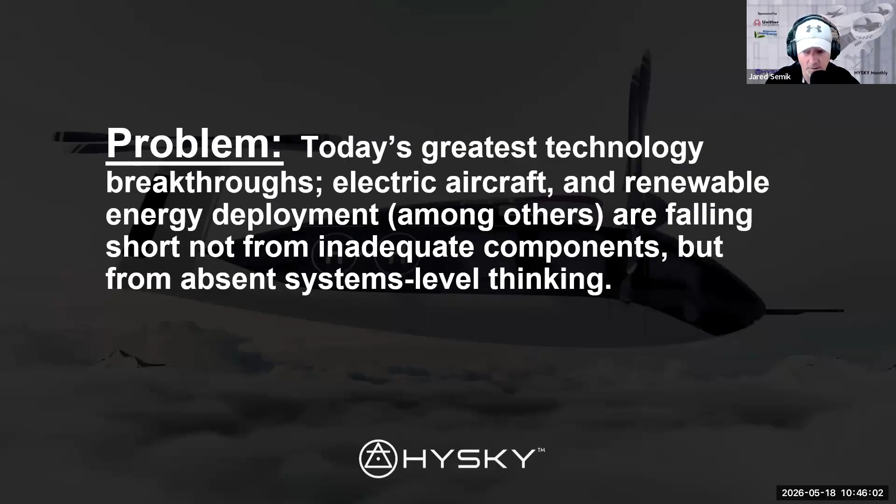Holism brings optimization and maximization of performance. Often the existence or non-existence of holism, either patchwork or holism, makes or breaks the actual economic and performance viability of a technology. So let's start with a couple of definitions.

Paradigm is a distinct set of concepts, thoughts, patterns, theories, and assumptions that constitute a legitimate framework for viewing and acting upon the world. This is our mindset, thought patterns, theories, and assumptions. This drives the way we think. The lack of holism in a lot of systems we're creating from a technological perspective...

...is driven by the fact that we have pre-existing paradigms that have been optimized through patchwork. Once we've created the system over time, say for instance aviation, it started out and evolved into this paradigm and way of thinking. The crux of this is when we start trying to change the paradigm, so it becomes very crucial that we hold a holistic understanding of how to change it.

The paradigm isn't just the way we're thinking about it. The paradigm can be the system in itself. So essentially it's a system of thinking, but it's also the system.

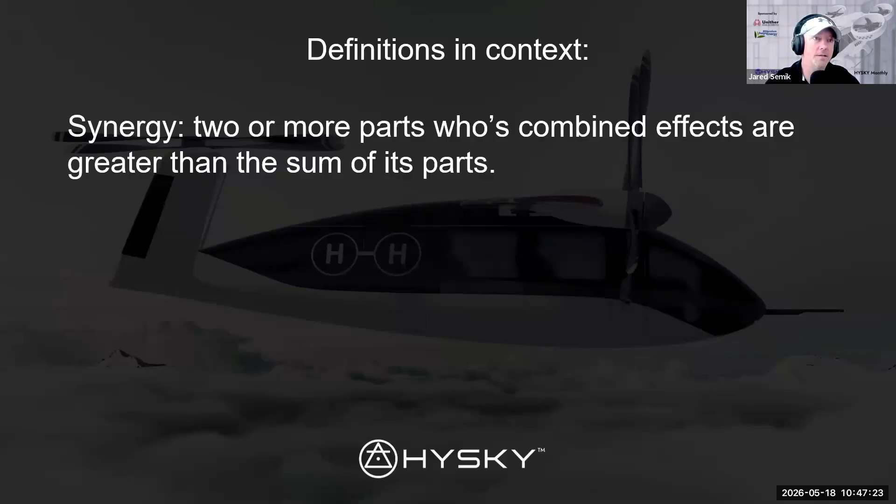One of everybody's favorite buzzwords is synergy, but let's define it: two or more parts whose combined effects are greater than the sum of its parts. We all sort of know this, but effectively the reality of that is synergy is found in shared energy and function. We always talk about synergy, and this is probably one of the things we fall flat on a little bit in engineering.

We get very hyper specialized, very hyper focused on components. In the process of improving those individual components, we do a very good job of creating new motors, new hydraulic systems, and new airframes, but we don't necessarily do a good job of sharing that energy and function. A couple of the positive case studies I'm showing will illustrate how that's actually accomplished. So this is what drives the synergy.

Holism is a philosophy that systems, whether physical, biological, or organizational—which goes back to what I was talking about with the Marine Corps MAGTF—can have holism in basically anything: physical, technological systems, biological like holistic medicine, or organizational like Marine Corps MAGTF. ASEX, I would say, is probably a holistic organization, the way they think.

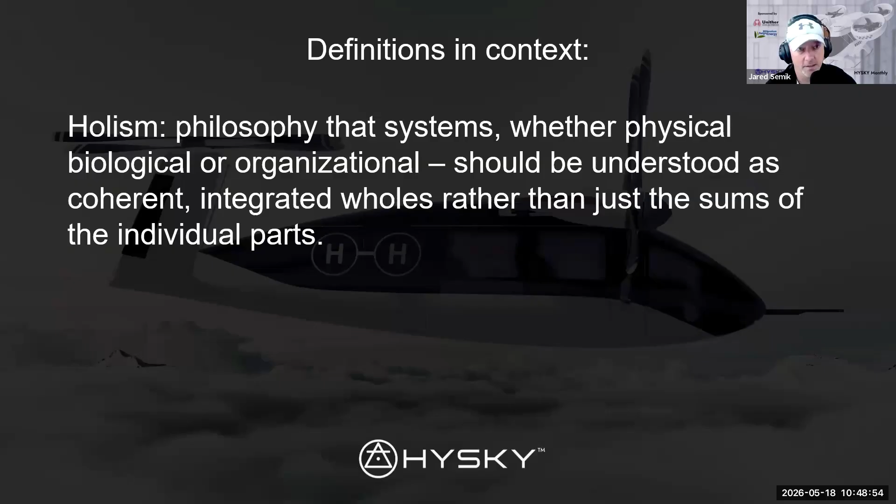It should be understood as coherent integrated wholes. Let's pause there—integrated wholes is the operative component here, rather than just the sums of individual parts. You're going to hear this theme emerging. It emphasizes that the system possesses unique emergent properties—that's another key axiom—emergent properties and behaviors that arise from interaction of components.

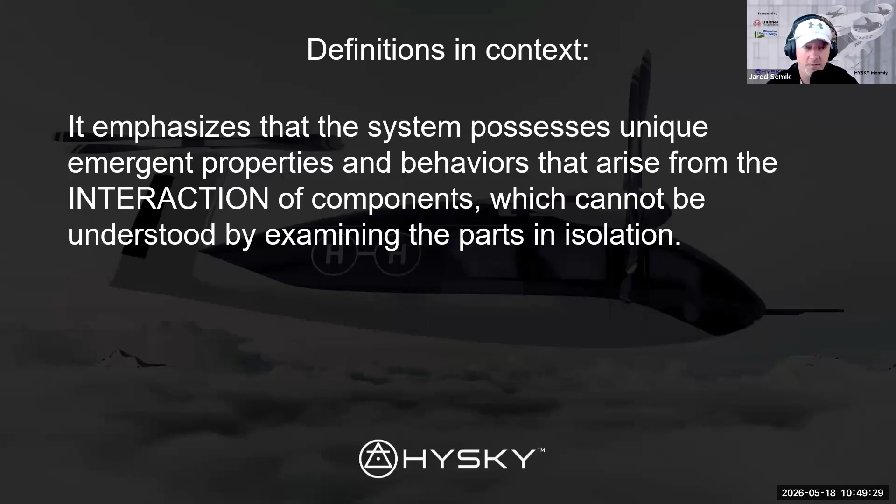Going back to this, the reality of synergy is found in shared energy and function. That's the interaction of components, which cannot be understood by examining parts in isolation. This is kind of what we're doing in some of the technologies we're producing now in humanity. A lot of it is getting the job done in terms of proof of principle and proof of concept, but it's generally falling short. Once again, holism is how synergy is created.

One axiom to ponder, another foundational principle, is that systems are driven by an energy nucleus with unique characteristics, and I'll show you why that's relevant. Every system that we create has a driving factor.

If it's a human system, it could be something like motivation of individual humans—what is the psychology, what is the sociology of the interaction between people? That needs to be understood. It's not just the individual's contribution to an organization, it's also how those parts will interrelate.

Humans in society are probably one of the best examples of how holism works—you either have it or you don't. Good organizations often operate from a very holistic perspective, in the sense that there's a lot of relationship bonding. In the military, we call it unit cohesion and morale. When you have a lot of unit cohesion, if it's an intentionally driven aspect from the leadership, you have all of these multiplicative gains in performance amongst the people.

So your team does quite a bit more with, say, 10 people working together than they would 10 individuals working in silo. So a couple of the examples of those energy nuclei: mechanical energy, like motors, engines, things that move; molecular kinetics. Thermal is basically thermal energy. Electromagnetic radiation, it's not necessarily the radiation aspect, but electromagnetism. This is what you find in motors and generators, etc.

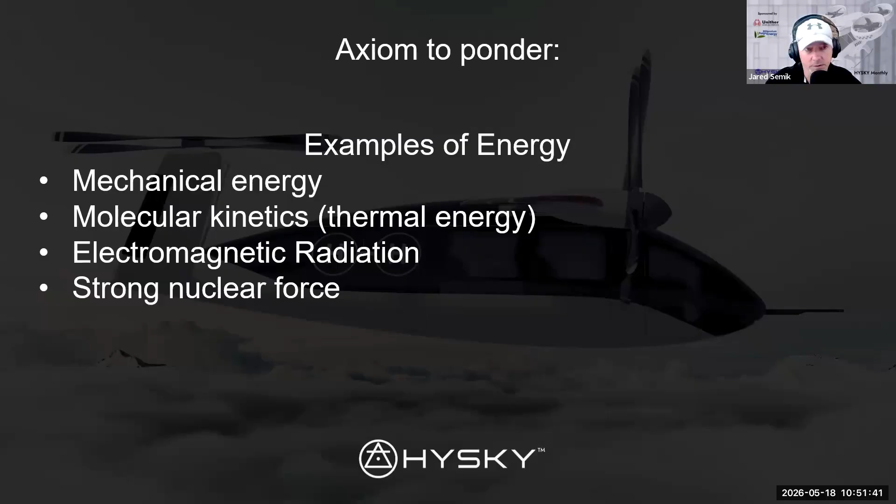All of these are subject to be converted to different forms. And then, of course, strong nuclear force, which is what you find that is the binding energy of atomic nuclei in nuclear reactions for nuclear fission. Any one of these has their own particular unique characteristics that need to be essentially built for or calibrated to.

So with respect to what is most relevant to this discussion for HySky and everyone in the aviation space, is energy storage mediums and their individual characteristics. So we've gotten away with Jet A for a long time, and most of which is simply based on its characteristics, its combustion characteristics, its lack of volatility, and also its power density and specific power. So you have this, because of its molecular density, it has a very good 50-50 split almost of power density and specific power. So per given volume and per given mass, it carries an adequate amount of energy that we can convert into something like thrust and then eventually into lift to do work.

When we want to change that paradigm, going back to the beginning where we're laying the foundation of, if we want to change that paradigm, unfortunately, it doesn't necessarily work to now go back to the patchwork optimization model to change the paradigm. You have to go back to a holistic approach to change the paradigm as a system, because again, that paradigm is a system.

So what we're currently facing right now in electrification of aviation is this sort of mismatch of mentality, is that we're doing a very good job, and I'm actually very impressed with a lot of the companies that are out there that are creating great electric motors and great fuel cells and great pretty much everything, and they're getting the job done from a proof of principles perspective.

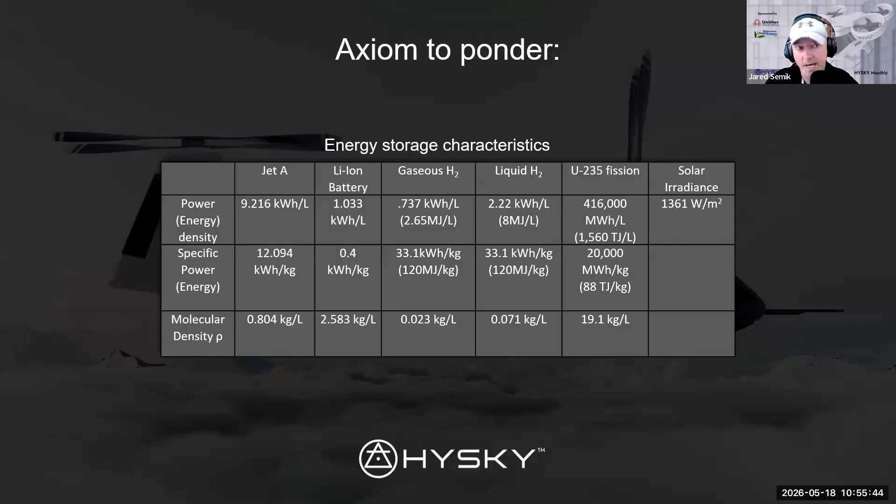So what we need to do is carry more energy. We need to bridge the gap between energy stored and energy used, because there's no amount of increase of volume of fuel stored for liquid hydrogen that's going to overcome that differential of power density that you get between the two.

So this is sort of where it ends up lending into holistic engineering. One follow-up is in holistic engineering, the system architecture calibrated to the energy nucleus precedes the components and drives the component development, instead of component development driving the system architecture, which is kind of currently what we're sort of doing.

Once we have a paradigm in place, we sort of have this mindset. So in aviation, we know that we use Jet A, we use open Brayton gas turbines, we use tube and wing. A lot of the stuff hasn't really changed. And what's happening is that we're kind of in a sense saying, what are the easiest low-hanging fruits to kind of replace those components?

Because we already understand this is how an aircraft functions. Unfortunately, so...

A little short story of Eternium is this: this is one of the things I identified in the past 10 years of developing the architecture for Eternium's Archangel. I recognized that if we were to one-to-one swap using a first-order Breguet analysis, to understand range from an empirical perspective, it was always going to fall short if I were to use the existing components and existing methodologies we're currently using without actually optimizing for these particular characteristics that hydrogen or batteries bring.

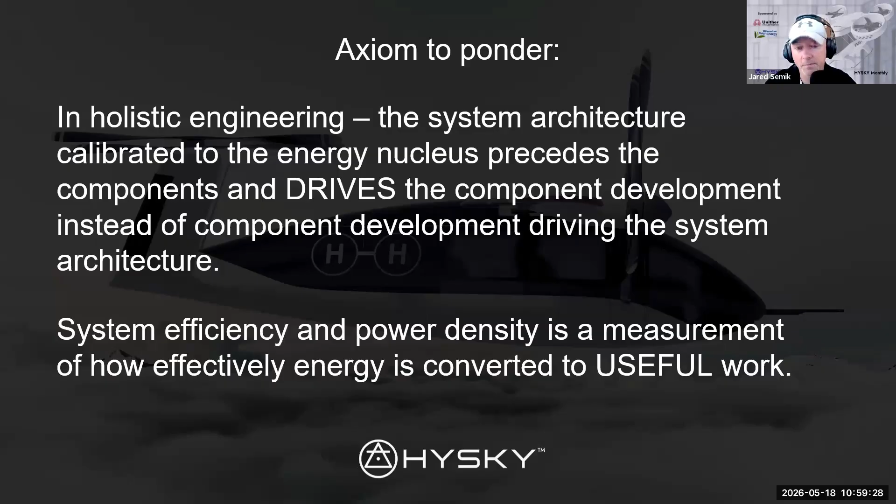It's that there are often times, and I'll show you an example with our aircraft, where if you were to take any of those components and not overlap the geometry, the mechanical function, and the use of energy, you only get singular siloed efficiency gains or power density gains. So in terms of orders of magnitude, you end up falling short.

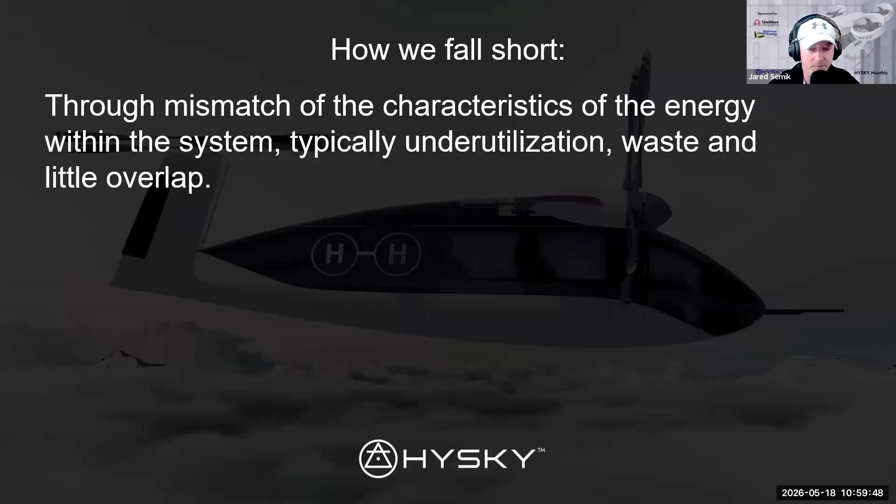So this is essentially what I just said: through mismatch of the characteristics of the energy within the system, typically underutilization, waste, and little overlap, you end up falling short. You end up getting basically a first-order gain instead of a second-order or multiplicative gain. So we can essentially define this as patchwork.

A couple of the case studies that I wanted to go through—disclaimer, these will be gross generalizations because there is so much nuance in this. You could essentially turn this into an entire semester lecture at any university. So what I want to examine is the cases of solar, wind, and concentrated solar power as it pertains to...

The mismatch of the duck curve. Mismatch in production and demand. This was known very early on by the Department of Energy, and it has only slowly been recently addressed. There's a couple of reasons why—some of it's mindset, some of it's economics. They usually walk hand in hand.

And of course, the most relevant here is electric aircraft. The patchwork and lack of first-principles calibration has led to airframes that are not competitive with the incumbent. There's a very important principle here, and I know I kind of get into hot water by pushing this narrative, but one of the difficulties we're running into is that funding operates on the promise of competitiveness in a market and/or cost reduction.

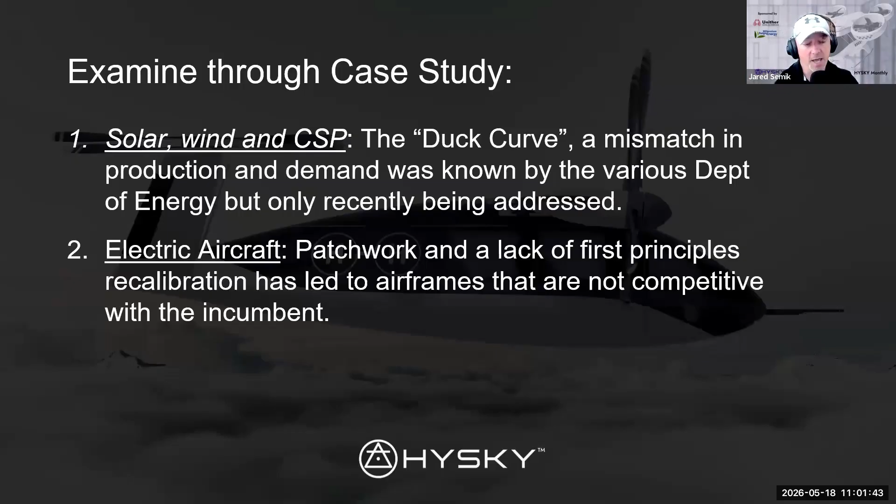It's the economics that essentially drive it. If there's essentially no competitiveness to whatever it is you're delivering on the top end—not the individual systems you're creating, but if that entire system, put against the incumbent, is not competitive without some recognition to its calibration within a niche that cannot be addressed by the incumbent—and I'll show you that in the eVTOL portion of the electric aircraft case study—you can end up with essentially patchwork if you understand the system of its operation and deployment. So, case study number one: deployment of solar, wind, concentrated solar power.

So let's talk about the promises. This is kind of what we're driving towards as goals. So the promises of solar, wind, and concentrated solar power is free energy. So it's not necessarily free, because we all know this...

We have to spend money on the equipment, but once the equipment is purchased, the energy is essentially free. It's ambient to our celestial selves here on planet Earth. So it's renewable and inexhaustible, meaning the sun and the wind it drives won't be depleted for billions of years. Consequently, with climate change, to the degree it's relevant, it's actually increasing the excess wattage retained in the atmosphere, which is driving higher concentrations of wind. So, win-win for wind.

So no greenhouse gases, of course. We all know this, everybody's been drilled with this concept for years now, during use, but only in production. And the production of greenhouse gases during production is actually pretty negligible throughout the life cycle of renewable energy.

One of the emergent properties now is energy independence, and we're seeing this on the global stage. Everybody's been fighting over resources since the beginning of time, and now it's become a global affair. So after production, no further mining, drilling, refining, and no complex geopolitical alliances are necessary to continue power production. This is probably most apparent with hydrogen specifically — say, green hydrogen and point-of-use production — this lends itself very well to energy independence.

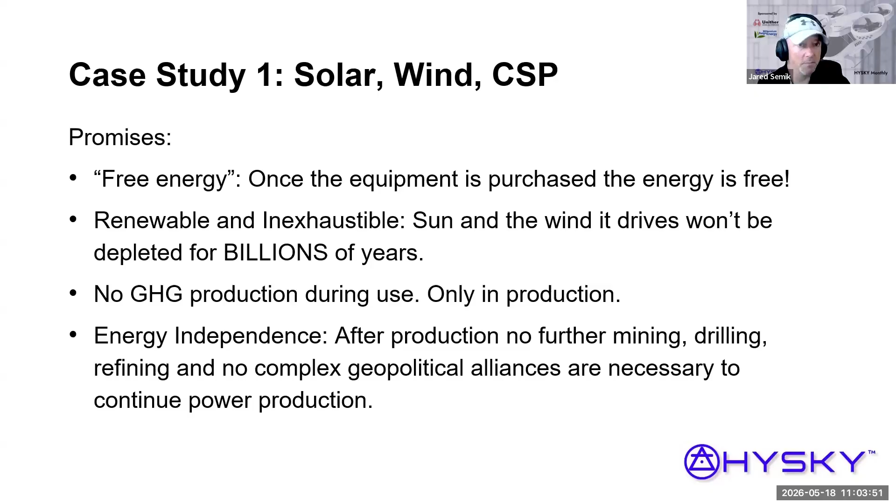So let's talk about the characteristics. With every system in the energy nucleus, they all have their advantages and disadvantages, and this is how you calibrate the entire paradigm — in this particular case, grid production versus cellular production like solar and wind on houses or commercial real estate.

So the advantages of solar: low maintenance, it's pretty much static, we all know this. It's sustainable — the energy comes from the solar radiance of the sun, which isn't going anywhere for billions of years. It's also scalable, since solar panels are small, you can scale them as large or as minimal as you want.

So wind — the advantages are it's very cost efficient, owing to its power density. It converts a tremendous amount of wind energy into mechanical rotation, and then of course into electric generation.

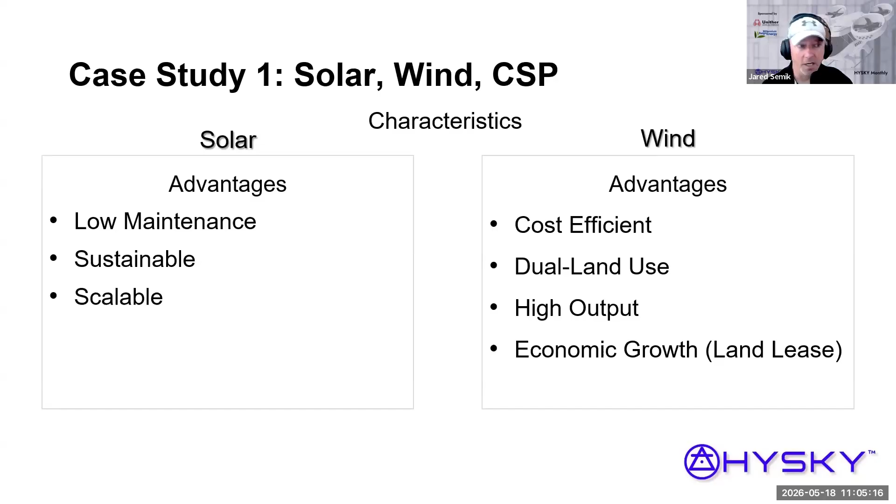Another advantage is dual land use. You can use the land those turbines sit on because of the lack of footprint — for farmland, grazing, or agriculture, etc., which lends itself to economic growth through land lease. You could be using the land, but also leasing it to something like PG&E or First Energy, where they're essentially paying for the use of the land wherever it sits.

Unfortunately, with the good, we also get the bad. This is what we essentially have to calibrate the system to — we have to take advantage of the advantages, capitalize on them, and holistically understand the systems. This is where most of our mitigation of the disadvantages comes from.

So with solar, it's land intensive, of course — it covers everything. What we're starting to see is clever use of solar on parking structures, buildings, etc., and it's been rolling out. I think we're starting to wake up to the fact that the system isn't exactly how we thought it was going to roll out. We kind of looked at it as a one-to-one, apples-to-apples swap, which it generally isn't.

Going back to the core principle, I think we first saw it as, okay, we already have this paradigm — we have nuclear plants, gas electric generation, and coal plants — why don't we just swap in this other component? I understand the engineers and scientists didn't necessarily see this, but this also needs to get into the mindset of investors and legislators, etc.

So a couple of the other disadvantages are material scarcity, of course — some use rare elements. Weather dependent — clouds are a problem; if you live in a cloudy place, solar doesn't work very well. Some disadvantages of wind are its unpredictability — wind is as unpredictable as the wind.

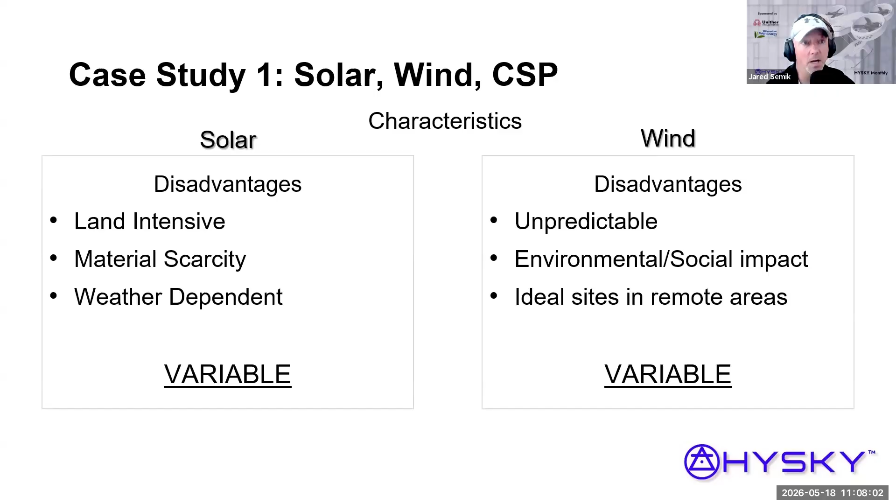But the issue with both of these is variability. So let's talk about the duck curve—this is where it's relevant. They fall short because of the duck curve.

We also have a similar issue with wind power because of its unpredictability. So very early on in the 2010s and 2020s, when solar and wind costs fell by about 90% and 70% respectively, developers treated production and storage as two separate industries. This is where you start getting into this economic mindset, and this is where you start seeing an emergence of patchwork solutions, since at the same time battery costs remained astronomical and would have doubled or tripled the cost of each individual project. These were not developed as a system.

The interesting issue is that each individual company was creating solar panels—they were a solar panel company—or wind turbines—they were a wind turbine company—and they were getting their own individual funding, with their own individual economic prospectus for what the return would be for that particular component. The only issue is there was very little in the way of implementation into the grid. There was talk of it in the 1970s.

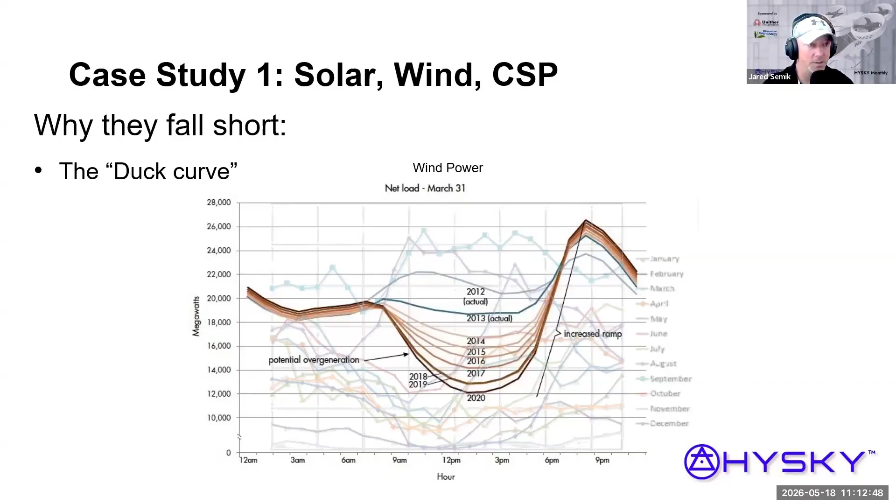So anyways, let's move on to electric aircraft. This is near and dear to pretty much everyone here.

Let's outline some promises of electrification: zero and lower greenhouse gas emissions, energy independence, and resilience. However, as I said previously, there is a bit of an issue—that's not how aircraft sell. Aircraft are basically sold on performance, life cycle cost, and operation cost, plus a couple other nuances. This is why I was saying these are generalities.

So these are the most important, essentially, tricks that they sell aircraft based on. What we're seeing with kind of the patchwork is taking that old paradigm. So you're basically trying to put new wine into old wineskins.

So we understand how a tube and wing works. We understand, say, a Q400. We understand the flight characteristics, the weight and balance, et cetera, et cetera. But what we're trying to do is we're trying to make a proof of concept.

Val has actually been quoted as saying that the only real way we're going to move forward is if we were to have clean sheet builds. Unfortunately, we as a system, an economic system of creating technologies, don't really see it that way. We see it in terms of this risk aversion and deployment and all these other components to getting to market.

So what you can see here in an apples to apples comparison, the exact same aircraft, Q400, and this is what happens when Patchwork is used. Not to slander ZeroAvia, they're doing an amazing job. I actually highly respect what they're doing, but this is what happens when you have a Patchwork.

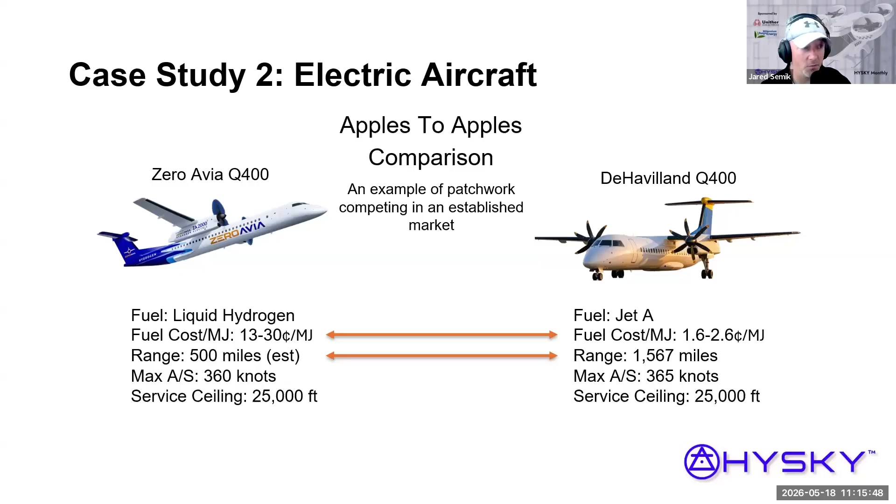This is what we're running into. So going back to what I was originally talking about with the unique characteristic, this is where holism starts to kind of emerge. So if you look at liquid hydrogen, which is what ZeroAvia is now starting to use, same thing with Airbus, so is Eternium, is that its unique characteristics are that it's extremely cold. And I'll explain why this is important later.

It also has a 858 to 1 phase expansion ratio that can be harvested. It also has, I wouldn't say much higher, but a markedly higher adiabatic flame temperature. It's higher than Jet A, which also can be utilized for an increase of Carnot efficiency in Brayton turbines. It has a wide flammability range, so it's tunable.

And this is something that we've actually used in Eternium, is that you can tune the fuel-air mixture because of that flammability range. You can tune that to thermally quench the combustion to lower or eliminate the NOx production from the direct combustion of hydrogen and air below the Zeldovich... what do they call it? What did I do? There you go.

Anyways, so a couple of the other components, the advantages: it's 11.4, just 11x lighter than Jet A. So you get this great mass fraction bonus if you're fully utilizing the volume in the aircraft. Laminar flame speed, 10 times faster than Jet A. It's a spicy combustion. So you can also utilize that. It increases the power density of your gas turbine.

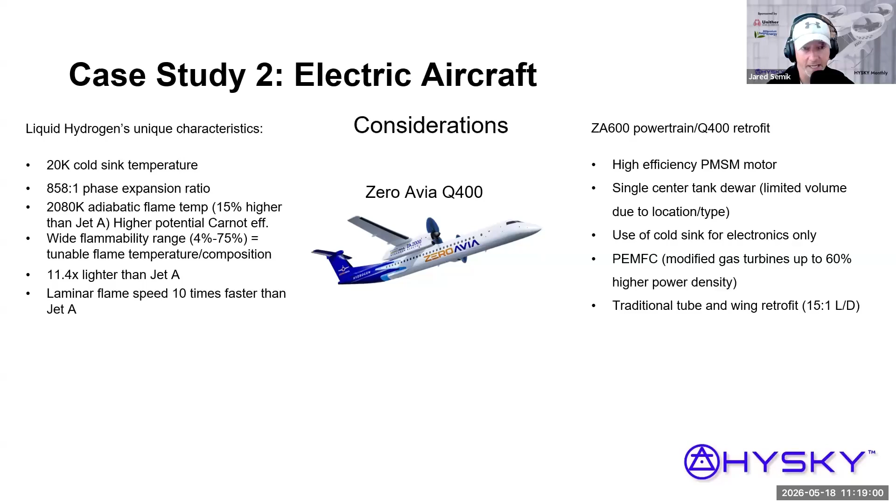It does, however, I've heard some rumor about them using the fuel for cold sink for electronics, but that essentially is where it ends for the traditional tube and wing retrofit. There are also a lot of gains that have been proven in non-traditional planform geometries like the B2, B-21 Stealth, Flying Wing, various other MIT, NASA, I think it's the X-48 blended wing body. These start approaching about 22 to 23 L/D aerodynamic efficiency. This is relevant when you start understanding the first order Breguet analysis of potential and range.

So moving on to EVTOLs, this is sort of what I was saying earlier, where there's a market comparison.

A lot of the EVTOLs have essentially used a bit of the same patchwork, but this is the particular case where Joby and Beta have found a great market niche, saying the disparity in range, fuel time, and fuel energy density is less relevant to the fact that now we can get you there faster and at a lower cost per passenger mile. It's essentially very close to the same unit production price and passenger capacity, so you have this apples to apples comparison. What you're seeing is an emergent understanding that even with a patchwork, if you look at its deployment from a holistic perspective, we understand not just the architecture of the technical system, but the economics can also be looked at holistically, to say where are these niches we can satisfy and what can we bring to the economics.

I have to admit I was early on very skeptical. I was an EVTOL skeptic, because I come from the rotor wing world. When I'm thinking of helicopters, I was an H-1 crew in the Marine Corps and a CH-47 crew in the Army. So when you're talking about operational ranges out to 3, 4, 500 miles with aerial refueling, you're looking at it from that particular operational application, and that's what I was actually stuck on.

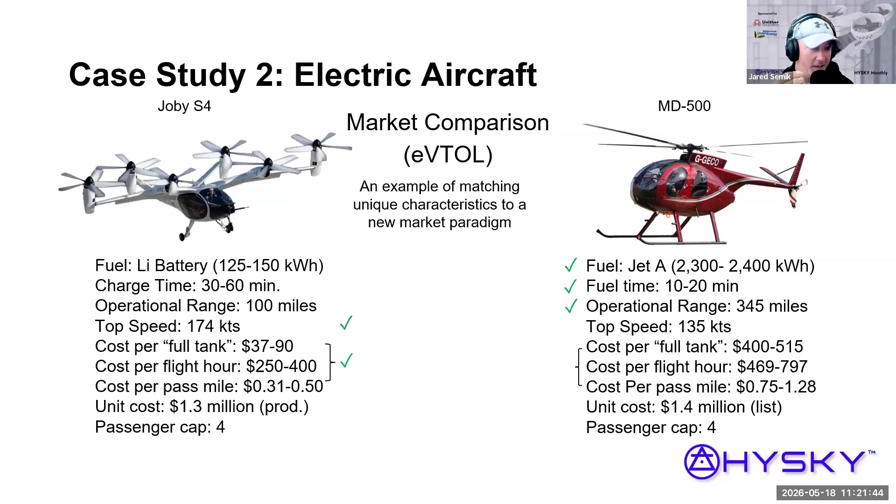So this gives you an understanding of how it doesn't necessarily always have to be a testament to technological holism, but more an organizational or economic holism. So how do we arrive here? Well, I've said it about my own mentality, and how do we stay here?

We eventually find our way at the top of that particular hill, and oftentimes that's what our patchwork is. This is the low-hanging fruit, the first thing we encounter. But unfortunately, we get to the point where we are below the threshold of viability, and then we realize the actual summit to climb is a larger mountain, much more difficult, with its own challenges. We realize that in order to climb that summit beyond the threshold of viability, we must first climb down that false summit of patchwork, ford the valley of risk, and up the holistic mountain to the top of a new paradigm, if you're following the imagery.

Keeping that in mind, we move on to holistically engineered systems. I took 3 examples, one that's really close to me, and two that I admire, one modern and one several years back. I wanted to outline how holism in these particular spaces was used to increase performance and or economics. The three are the SR-71, and more specifically the J-58, amazing technology.

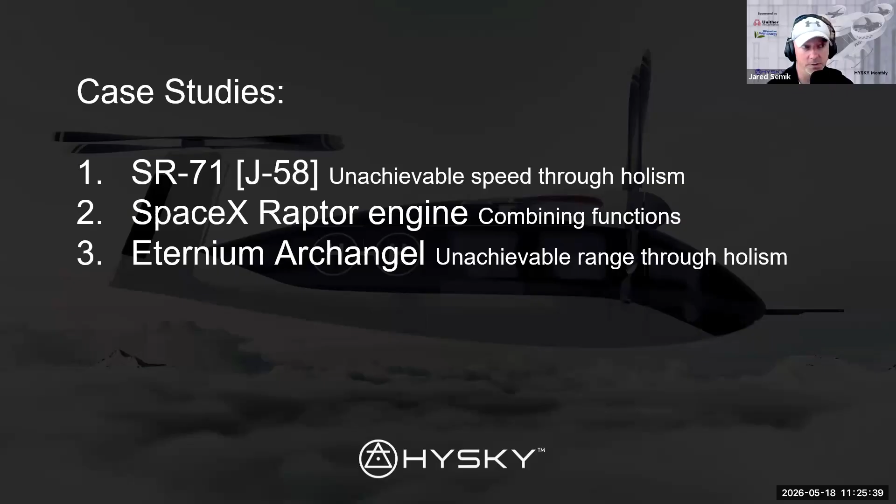The other one is the SpaceX Raptor engine. This is a brilliantly designed rocket engine, not only from a technical perspective in terms of their dynamic selection, but also how they've manufactured it from Mark 1 to Mark 3, where they are right now. It's a testament to the virtue of combining functions. And then, of course, the one that I know the most is the Eternium Archangel. It's unachievable range through holism.

So let's start with the SR-71. Let's talk about the relevant specs. Previous to this, these specs were essentially unachievable. Prior to the Oxcart program, which is the predecessor to the SR-71 platform as it was in production, there were no production aircraft that could exceed Mach 3 — those used for espionage and intelligence gathering. Prior to this, the U-2 also flew at roughly the same altitude, but not at the same speed, Mach 3 plus. I think it holds a record for Mach 3.3, but talking to some of the pilots that have flown it, they said it'll go much higher than that.

Consequently, this is also the first stealth aircraft — the first production stealth aircraft that used RAM coating, which is a little-known note that I didn't actually know until recently.

So to outline what they did — this is how holistic engineering sort of works. If you look at it, there's a list of overlaps, a list of shared energies, and a list of shared components. The first one that's notable is the symbiotic propulsion and airframe design. The J-58 engines were mounted in the airframe, but the intake spike, bypass door, and exhaust were all airframe components that were also used in the J-58's function to improve its thrust characteristics throughout the entire operational range. So all the way from subsonic, from 0 to 3.5 Mach, these components — the intake spike, the bypass doors, and the exhaust nozzle — were all designed to work in concert with the J-58's individual components to add performance that didn't exist previously.

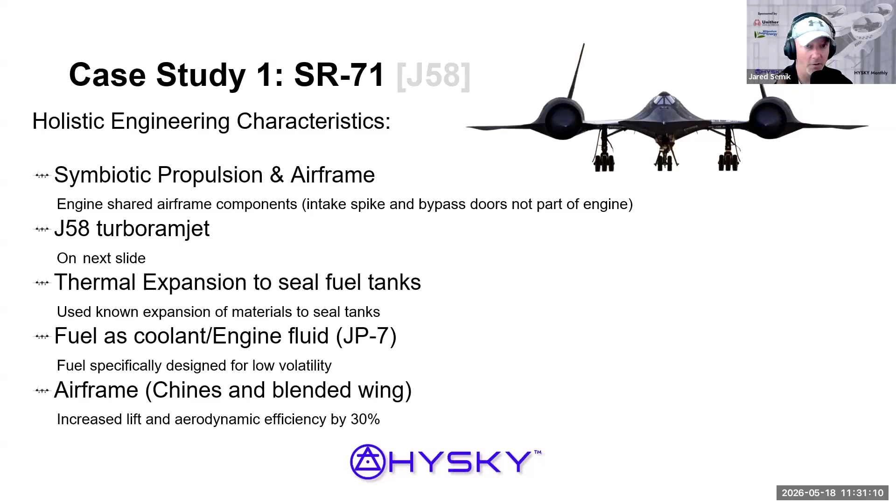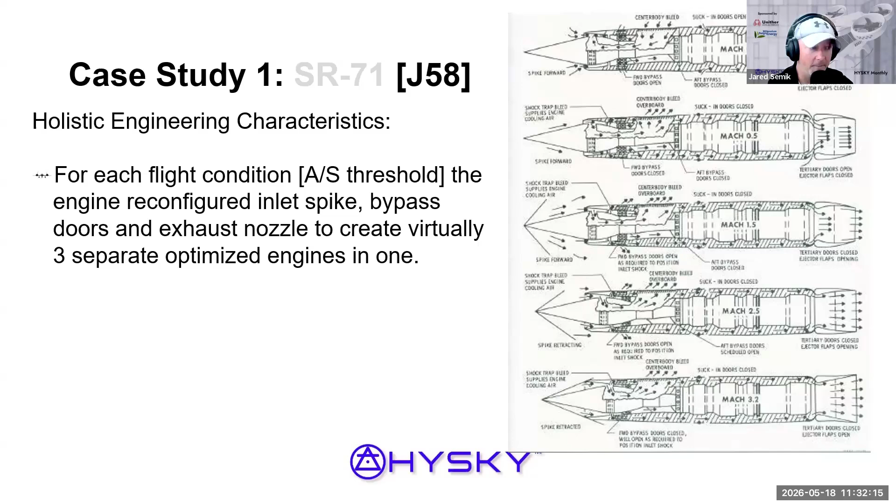So the emergence of the understanding that at these particular velocities and temperatures, we needed to create an entire system that created three optimized engines in one. And this is getting that holistic airframe and propulsion system symbiosis, or synergy. What you have going from top to bottom is five different configurations, from rollout and takeoff all the way up to top speed. Each of these components adjusted themselves to change the aerodynamics, fluid mechanics, and thermodynamics within the system, keeping in mind the specific characteristics of the fuel to produce the right amount of thrust, reduction of drag, and reduction of parasitic drag from shock waves. So this is one emergent study.

So the second case study is the Raptor engine. I'll go through this quickly. This is, I think, a revolutionary design. It used an old Russian full flow stage combustion architecture. Why this is so spectacular is that the advantage of full flow stage combustion architectures is that it understood the system of thermodynamics and heat transfer to such a high degree that it increased the efficiency of the burn. You'll see this when we compare the BE4 versus the Raptor, where it is now.

So its evolution was also holistically derived. Going back to the original axioms I was talking about with holism, this is showing how combining elements, principles, and energies, you transition from the original Raptor, which is essentially a proof of concept, to the Raptor 2. I'll show this in the next slide. And then on to the Raptor 3, where you're watching it lose weight, but if you look at the specs, it's gaining thrust.

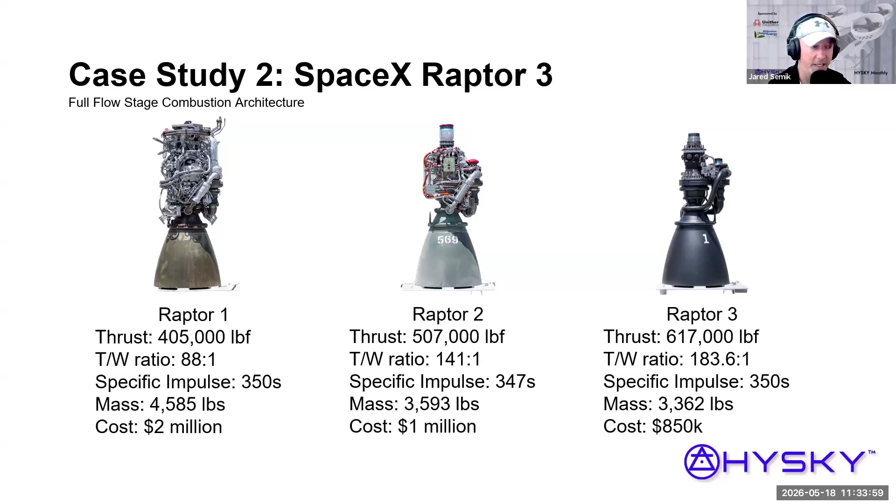So what you're seeing here is gaining efficiency. It's dropping weight, and in the process, because there's often an inverse relationship between performance and economics, you're seeing the cost decrease. So you get thrust-to-weight ratios increasing, overall thrust increasing, mass decreasing, which is also increasing the performance of the entire rocket system as a whole, but then you're also seeing the economics start to catch up and improve. So what you have here is proof of concept.

So you took that full flow stage combustion architecture, which gives you an increase of efficiency through improved combustion dynamics, by hyper-leaning and hyper-saturating the methalox fuel in pre-combustors, which can then be folded back into the expansion of the liquid oxygen and liquid natural gas that make up the methalox. They take that expansion energy, similar to what we use in Eternium with hydrogen, to increase, through the pressure it produces, the efficiency of the pumping. Then it dumps that heated pre-combusted mixture into the combustion chamber of the rocket engine itself, drastically improving the efficiency and reducing the unburned portion of the fuel-air mixture.

So what you end up having here is this evolution: proof of concept, then combined component function and space externally. This is where you start to see component functions being combined. Then the Raptor 3 is where you start to combine all of that internally through additive manufacturing and advanced metallurgy. They understand that all these principles can be combined, taking the entire thing as a whole, and that's what you're seeing as the result in the Raptor 3 - the result of that leaning, because we understand the base principles from first principles of how this drives the system, and because they're not risk averse.

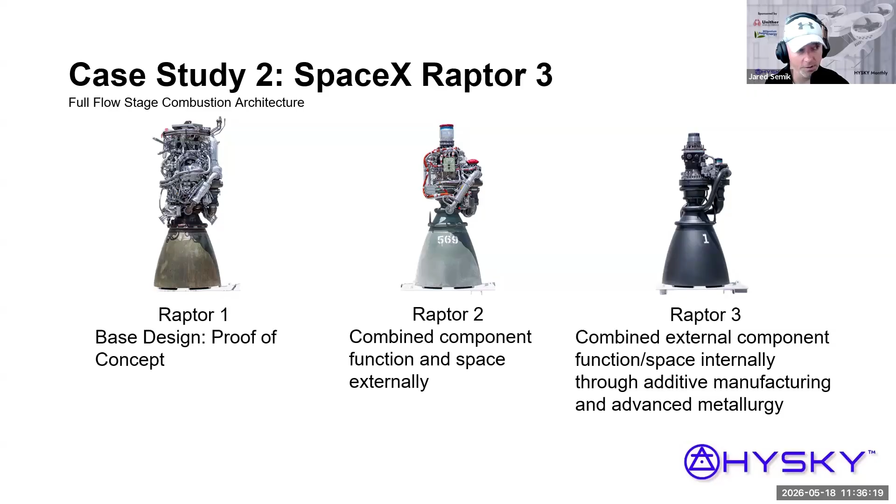Pretty much all of Elon Musk's companies have very low risk aversion, and that's where you see a lot of these revolutions - where you start to see a lot of this holism, combining the energy, as seen in the full flow stage combustion, and starting to see that holism in the manufacturing. Comparing this to what Blue Origin uses, the BE4, you see comparable thrust - so this is an apples to apples comparison.

Relatively same specific impulse, but different architecture. So open combustion is far less efficient than full flow stage combustion, and you're seeing that pay dividends in its thrust to weight ratio. You can definitely see this when comparing the mass — much heavier rocket engine for very similar thrust, much lower mass, and look at the cost comparison.

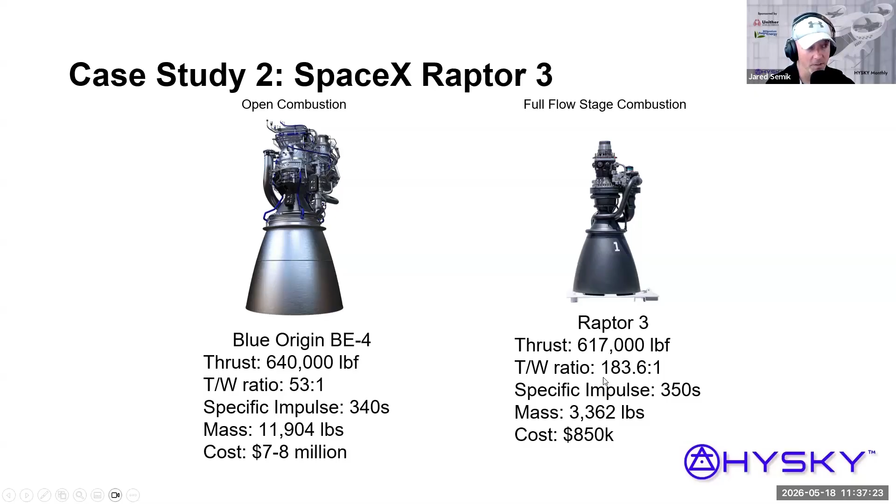When you're doing things kind of patchwork, you end up having this non-integration disadvantage where that lack of efficiency and the lack of combining components in manufacture ends up skyrocketing the cost. So what you're seeing here in the Raptor is an increase of performance, which gives you the performance increase you want, but it also has a direct impact on the economics.

So this is the closest to me. We set out about 10 years ago — well, I set out about 10 years ago. We integrated about 5-6 years ago when we incorporated, with the explicit goal to create an aircraft that is competitive to the incumbent. It's basically to replace the incumbent. Well, how are we going to do that?

When I looked out into the industry, I was seeing Zunum at the time, Eviation at the time, Universal Hydrogen — everybody was starting to build these patchwork designs. A lot of them were running into issues where they were not having very competitive range. Unfortunately that had an impact on the investors, because once they understood this wasn't going to be particularly competitive in an open market at a system or platform level, with no consideration of market niche or increase in economic advantage — like going back to the eVTOL discussion — it was basically going to fall flat on its face.

So what I wanted to do is use a benchmark, because I used to work at Gulfstream. So I used the Gulfstream 650 as the benchmark — how can we possibly use this energy nucleus of hydrogen to create an aircraft that is competitive to the incumbent?

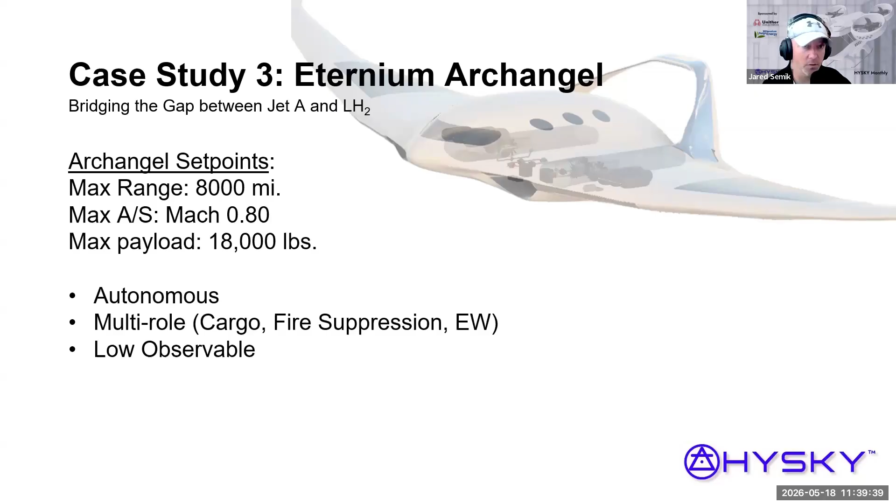So we set out to make it autonomous, multi-role, low observable, etc. But one of the ideas is, how did we actually get there?

This is the crux. We make these outlandish claims that we can make an aircraft that goes 8,000 miles versus 500 or 1,000 or 250. In the case of Eviation, we can make one that goes out to 8,000 miles, but we had to completely rethink the way we were doing everything — the way we thought of the fuel, the planform, the propulsion. How do these elements come together?

So what we ended up with is a blended wing body that increases wing volume integration when you use conformal wing tanks. When you look at it from an energy perspective — and I'll show you in the next slide — this entire thing is about going back to some of the beginning axioms: how do we best convert the energy that is available, using its characteristics, into the work that we need? I had to completely rewire the way we were thinking about the system.

So what we ended up coming up with is a couple of elements. Because there was a big gap in volumetric energy density, we had to shore up that gap. We could only carry so much more, even with conformal wing tanks — cryogenic Dewar conformal wing tanks that we've designed. There's only so much of an increase you can get, and there's a way to actually increase the volume and also increase the efficiency of the airframe itself. This is actually what we accomplished. All of this has to be thought of as an entire system simultaneously.

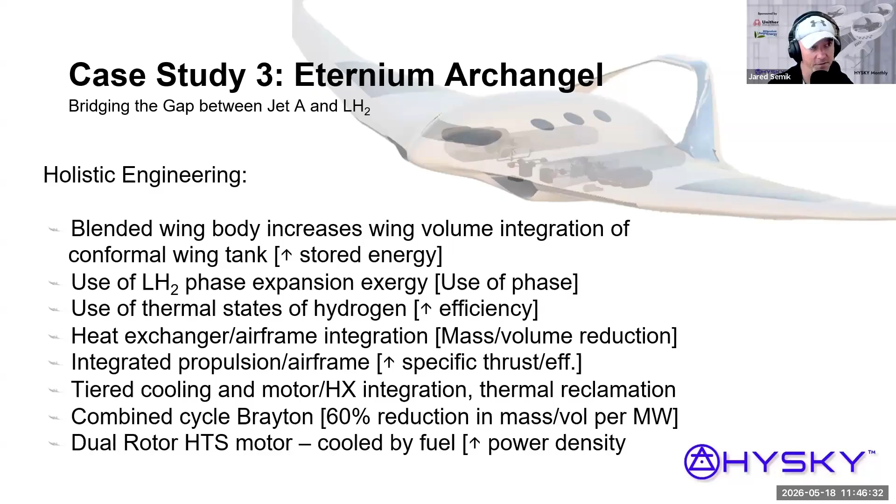So each one of these becomes an issue addressed by these individual components. All of this being put into the Breguet range equation is really all to say that each one of these elements is addressed by these individual components. So once we understood the entire system, it was to say, hey, we have a very unique storage medium. How do we best capitalize? What do we need to do as a system before we even started thinking about these components?

And then each one of these started to emerge. So we started seeing increased energy storage capacity by making our conformal wing tank. This is a cryogenic honeycomb core composite conformal wing tank. This is a proprietary item. This is not exactly what it looks like, so nobody can copy it.

But this gives us a better mass fraction by carrying up to about 8,000 to 9,000 gallons, because we have an expanded wing volume due to the blended wing body configuration and the supercritical airfoil choice. It created a larger cross section and a larger wing volume so we can carry more. How did we do that? We actually had to use the wings instead of just a center tank.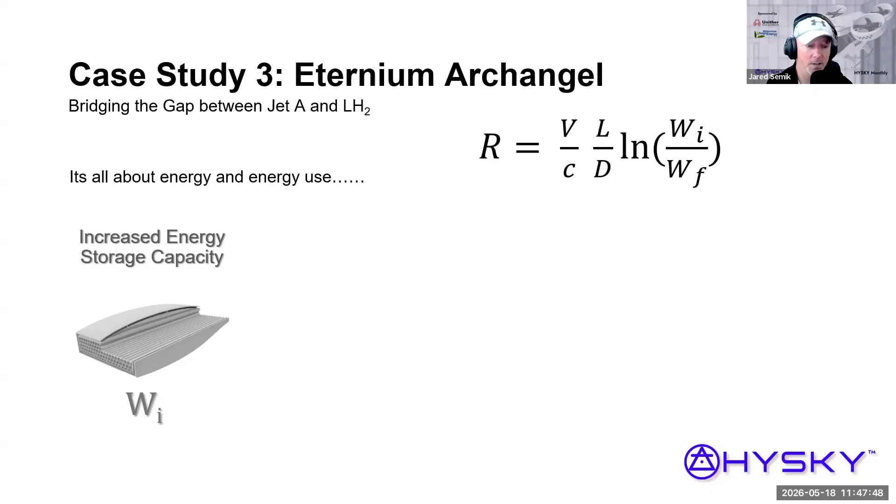So moving on, what I was describing with the combined Brayton cycle and HTS motor, all of these combine together on the propulsor module. This can either be set on the propulsor module or in what we're calling the Creighton, the combined cryogenic Brayton cycle, which is highly reclaimed. So all that thermal energy is being reclaimed back into the system until it makes it low quality heat energy, at which point it's exhausted at a low temperature.

So that exergy of expansion can be put into the Creighton system. It increases the conversion efficiency, and then into the HTS with our wide chord propulsor, and then our ducting and nozzle system, which is like the SR-71, an integration of the airframe and the propulsor system. It increases this component of velocity over thrust-specific fuel consumption, this V over C.

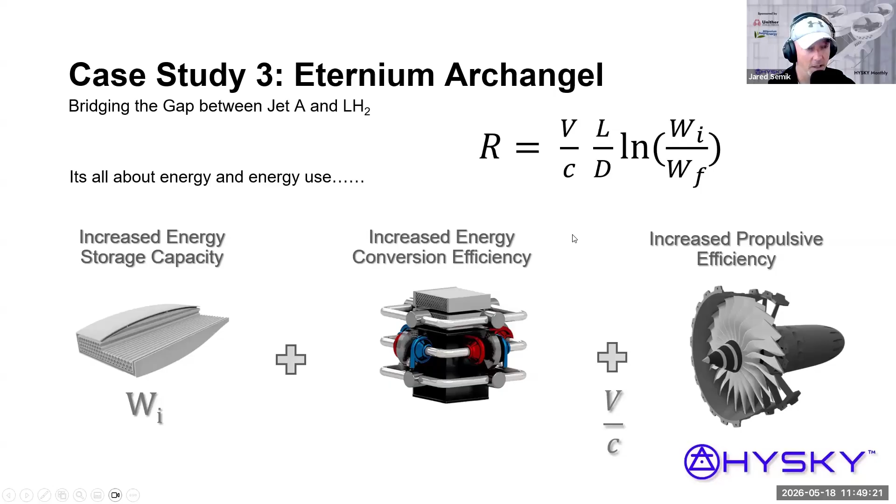So these are ordered in inverse importance. Your V to C is probably your third most important, your L to D is your second, and your mass fraction, the relationship of your mass of fuel versus your consumption rate, is actually what gives you your astronomical gains. So putting all that together, we increase the aerodynamic efficiency, and going back to what I was talking about, we got all these gains. We essentially achieved increases of mass, efficiency of conversion, specific thrust, and efficiency by using the non-axisymmetric nozzle system.

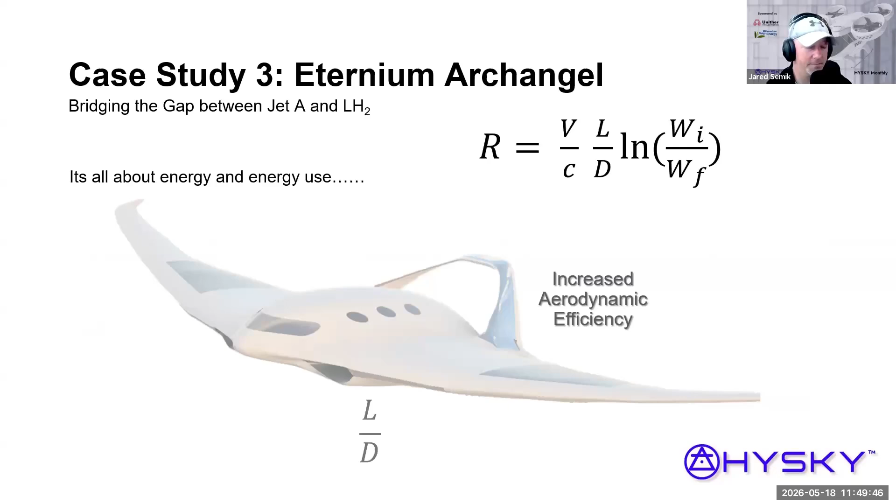And then, like I said, all of those become your hitching post components. That becomes your component revolution. That's what ends up informing it. So it looks slightly different.

And then going back to the manufacturing that we saw with the Raptor motor, now in the design we are starting to combine the manufacturing with the design. We can integrate what would normally be very heavy, very bulky heat exchangers into the airframe, into the combustion chamber, and certain portions of the Brayton system. They also become essentially 3D printed, and a lot of them are composites, so they're very lightweight, but the efficiency increases because they're also point of use.

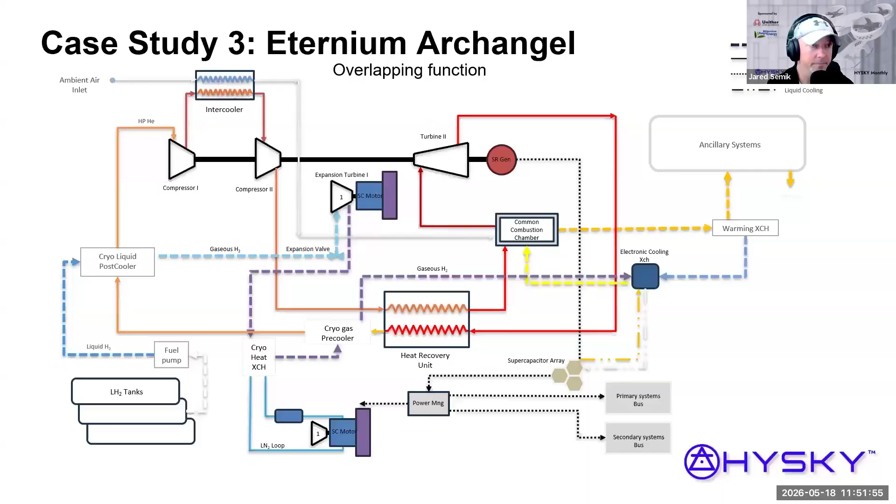So just an illustration of the synergy where you have this increase of fuel volume, and all of these elements are borrowing energy and essentially putting back energy. Every one of these overlaps gives you what we call a multiplicative gain, which is essentially where your synergy lives. And you can't do that without sharing mechanics and energy.

So that's the one big takeaway for this entire lecture: we need to understand the key unique characteristics of that energy nucleus. We need to understand the system first, derive all of our creative understanding of the system, and then allow the components to emerge from there.

So what ends up happening is that this also becomes a tiered rollout. So instead of going to the Defense Department or VCs, you have to keep them — and this is one of the things we're running into organizationally — everybody wants to essentially de-risk by tech block. Unfortunately, if we're creating these tech blocks, even when holistically derived, if I try to lob those to an OEM, a Northrop or Lockheed or Airbus looking for a specific component we derived for a system very specifically tuned to the characteristics of the fuel source, it's not necessarily going to give you the multiplicative gains just by slapping it into their system.

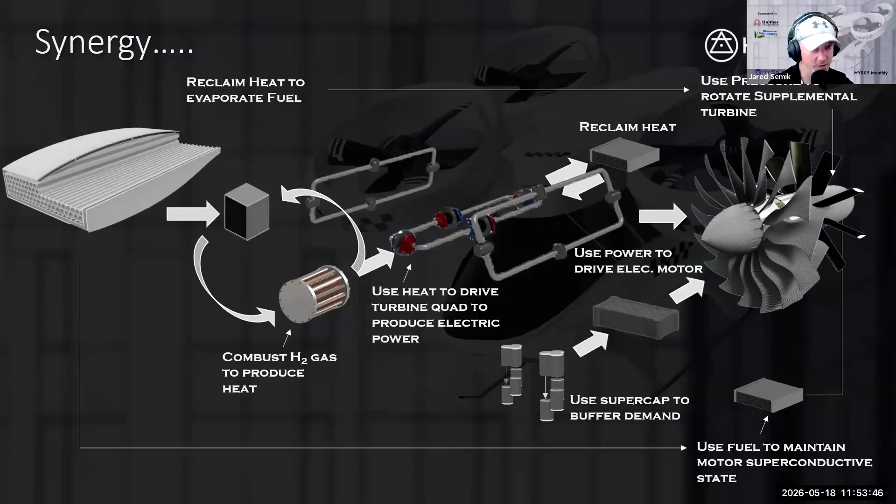And the mathematics essentially support it. That's essentially what I was outlining with the Breguet analysis. So that's pretty much all I have.

I'm going to open up the questions. If anybody wants to take any of this offline, you can contact me on LinkedIn, and also directly via email. I'm the type of person that loves to respond to people's inquiries, I love to talk about this. I've now shifted a bit into educating the industry on how holism really works and how it can benefit pretty much everything we're currently creating that we want to build capacity for in society — it's on the other side of good systems thinking.

I hope I was able to bring together a better understanding of the difference between holism in terms of the bottom line of performance and economics and its competitiveness to a pre-existing paradigm, and what happens when we don't quite get there, when we think of it as kind of patchwork parts. So, suppose I could open this up to questions. Let me go back to...